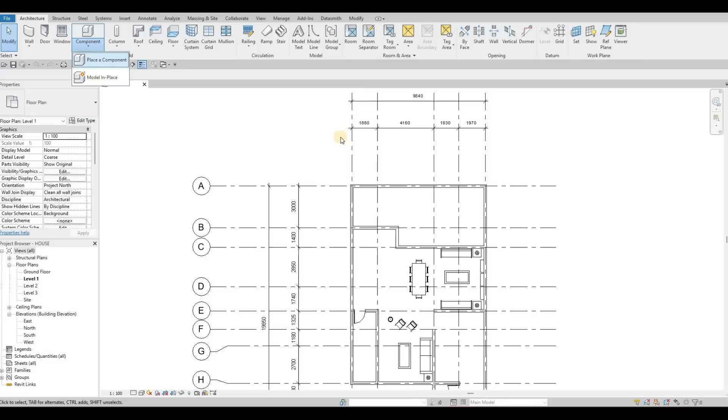So what we're gonna do is click here under Architecture, Component, and then Model In Place. We're going to select Generic Model and then press OK. You can even name this, put it as base cabinet for kitchen or whatever name you want, but I'm just gonna leave it at Generic Model number 1.

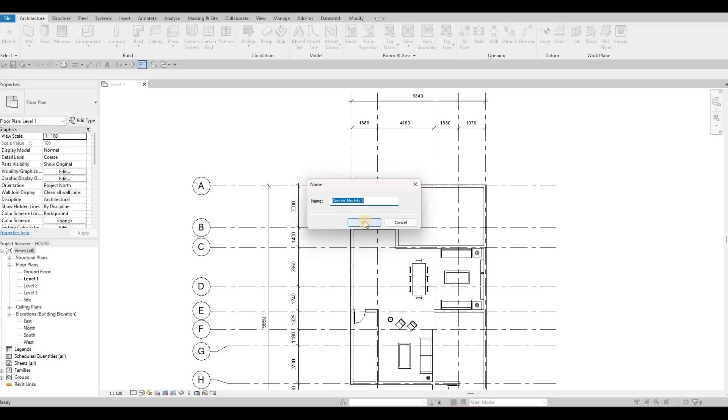And then after that, we're going to create an extrusion, and then we're going to select this rectangle right here. I'm planning on adding the fridge right on this area, so I'm gonna give some space. And the good thing about model in place is that it is easy to manipulate afterwards.

So we're just going to create this for now, and then we could extend it or decrease it depending on how we want it. So here, the depth, I'm gonna set it as 700. You can even put it as 800 because we have enough space, so it's really depending on you. Just to be sure, I'm going to put 750, and then here as well 750.

And then of course you need some space on this side for people to have some room to go in and out from the laundry. So I'm going to extend this one all the way right here, and that's good enough space.

And then here will be the fridge, and then I'm gonna create a casing for the fridge, and then we're gonna add those fridge right there. So TR, trim to extend, and then delete this part right here.

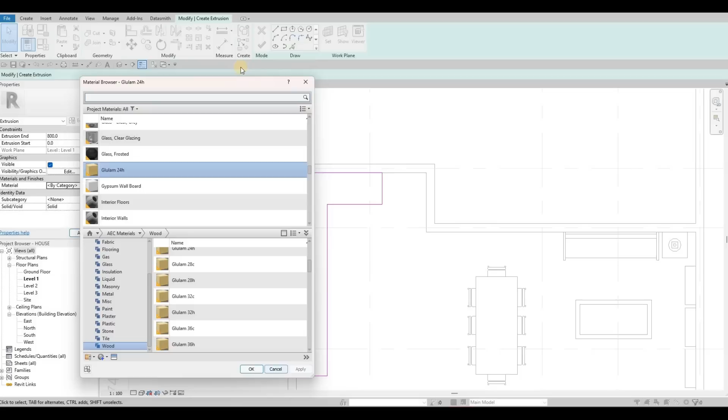I'm going to pull it up, and then Glulam 24h, and then click finish right there.

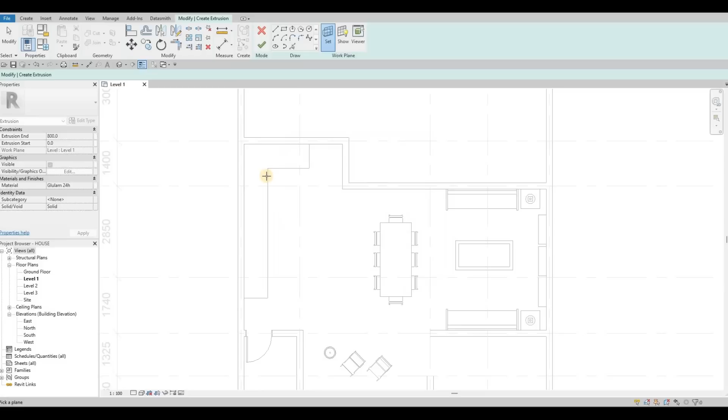So we have that one created, and then we're going to add in our countertop. So we're going to create again extrusion, but we're going to set it at the top of here. So pick a plane, and then we're gonna select the top of this one. So now it will be exactly at the 85 or 800 height, and then we're just gonna extrude it 25, so the thickness for the countertop.

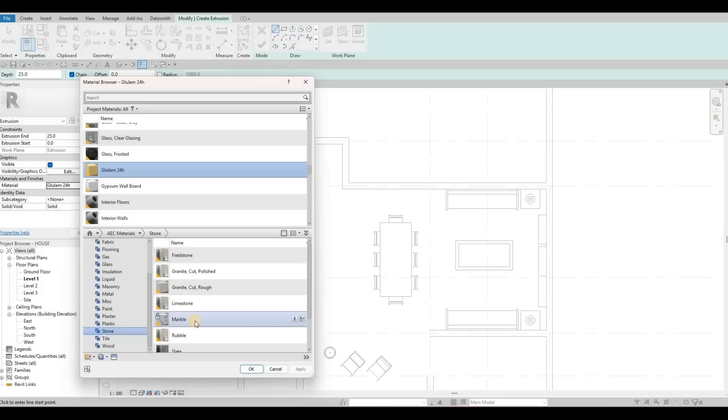And then we're going to put it at a stone material. So Granite, Cut, Polished, we're gonna use that. Apply, and then OK. So now we're gonna do the same thing, but we're just gonna use this so that we don't need to do trim and extend.

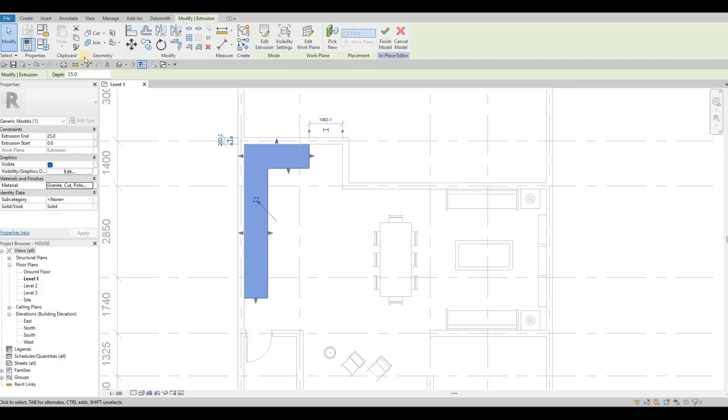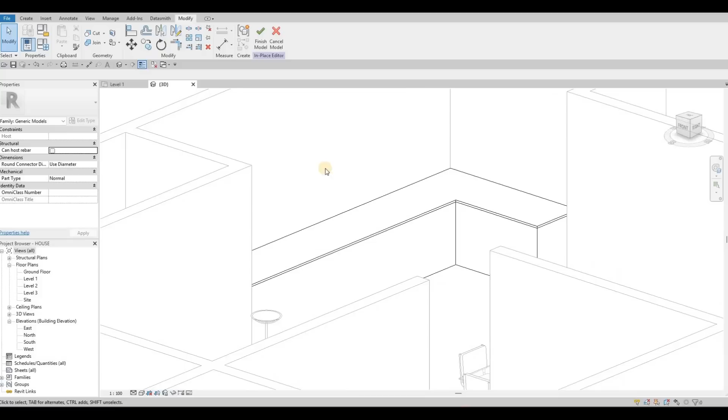And then click finish. So now if we see this one, we could go 3D. As you can see, we have that one all to the proper height, and then this one is 25 millimeters thick for the countertop. And then of course we're gonna create some top cabinets as well.

So now we're going to go at level 1 again. And then here, it's really up to you in terms of how you're gonna add it.

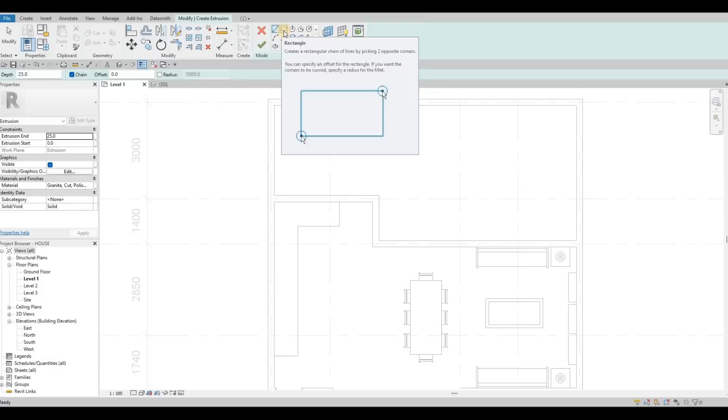I'm going to create another extrusion on top of this, and then I'm gonna use this one again, rectangle, and then I'm going to add around 500, or even 450 if you want. 450.

This will be for the cabinets at the top level of the kitchen. So here I'm going to trim and extend, and then delete those small ones.

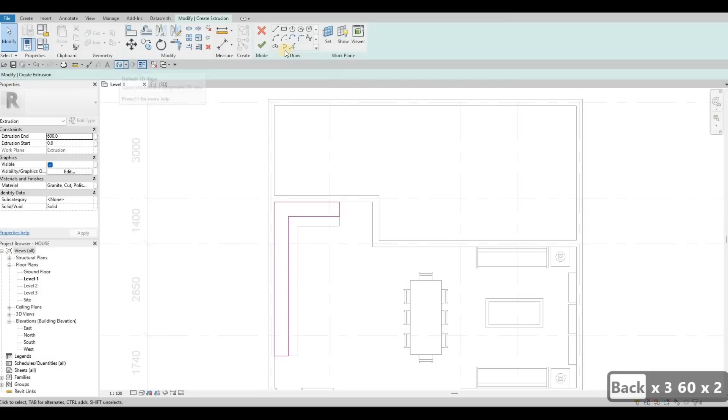Here I'm going to make it a little big, 900, and the good thing about this one is I could estimate it while I'm in 3D. So if I finish this, I can pull it up like that. We're going to have 200 for the flooring, so I'm gonna estimate it like that.

And as you can see, we have our cabinets already there. So we can set it up a little bit higher or a little bit down if you want. I'm just gonna leave it like this. I'm going to have a backsplash as well.

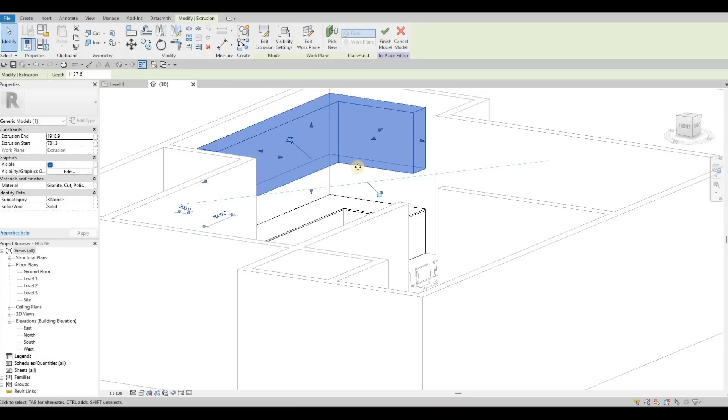We could put in some lights, and then we're gonna put some faces on this kitchen cabinets. But here we need to change it to the same one as the base cabinet, and then there you go. That looks good right there.

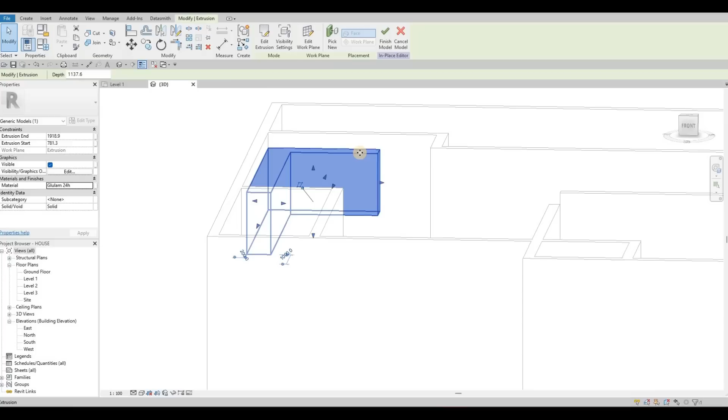200 for the floor, so it will be around here. We're just estimating it now, so maybe we could do it properly here. So we have 3,000.

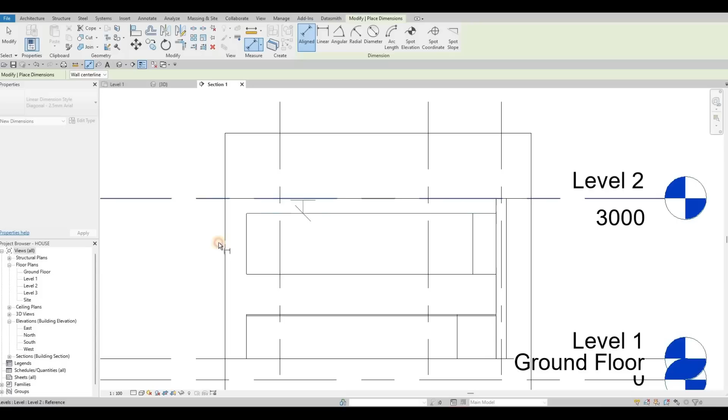What we can do is finish this first, go to level 1, and then create a section. So click here and then section, so that we could see everything. Flip this one, press escape, and then double click this one. Now we can be exactly just 200 of this. If you want to be exact, you can definitely be, so that we don't have any more problems.

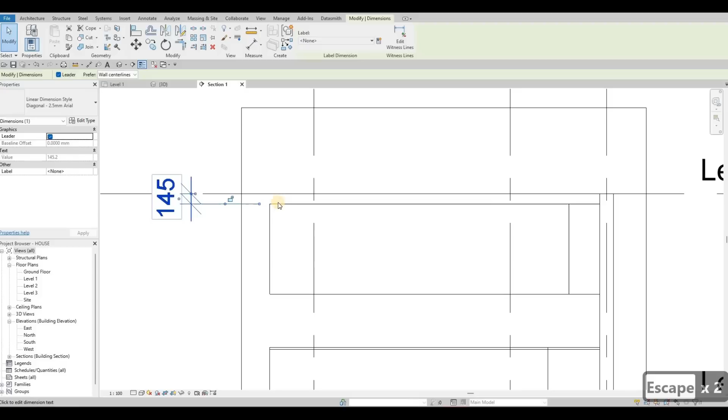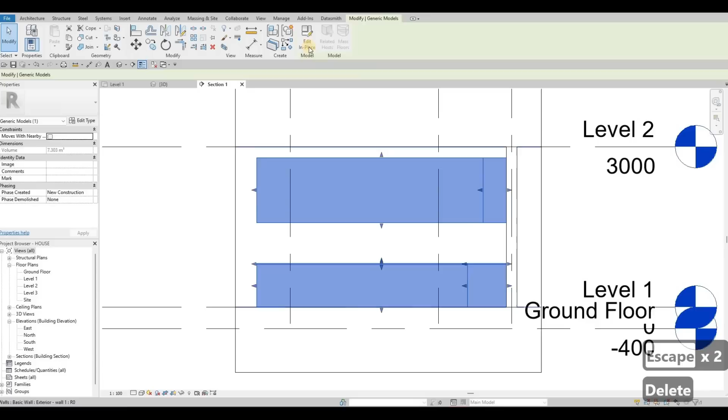For some reason it's not doing it, so I'm just going to manually decrease on that. So there we go, 200. Actually we could even edit in place so that... now I think that's good enough even for the backsplash. So we're good with that.

We have the thickness here. It really depends on you if you want to pull it up or down a little bit more. For me, I'm just estimating it, and I think this is good enough. So we have this one all the way to the top, and then we have backsplash here.

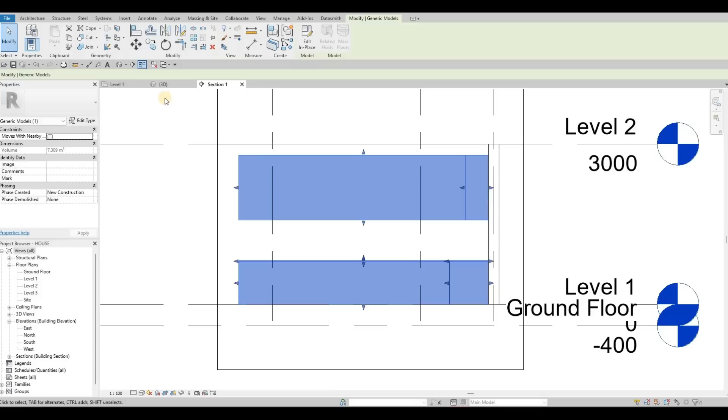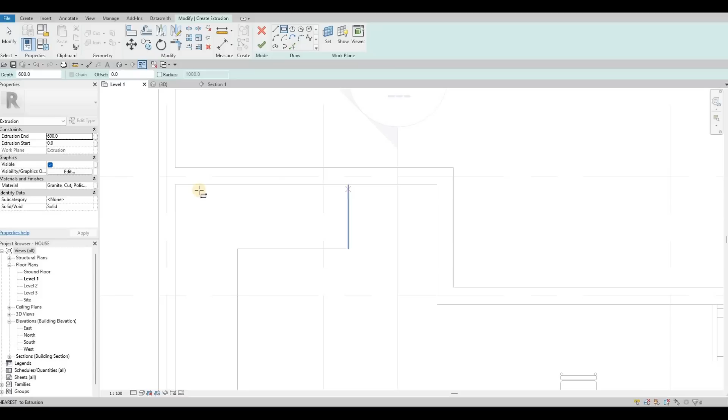So for the backsplash, what I'm going to do as well is add something here. I'm going to edit in place, extrusion, and create an extrusion from here. We're going to make it a little bit bigger for now, because it's giving us some problem.

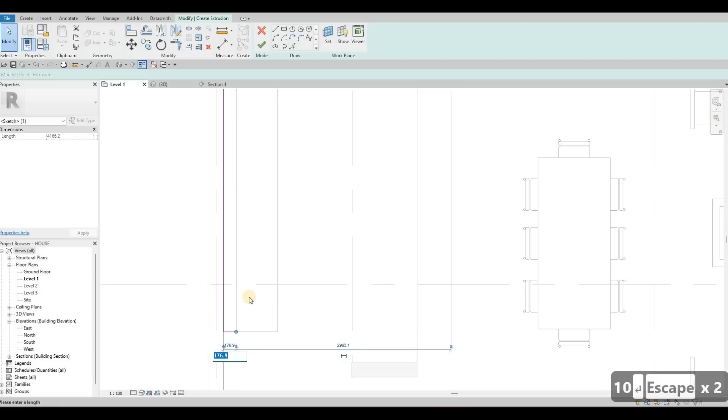We could put in 10, so 5 is too thin, so I'm going to put in 10 for the thickness. There we go. And then we could just trim and extend again, and then delete those small ones.

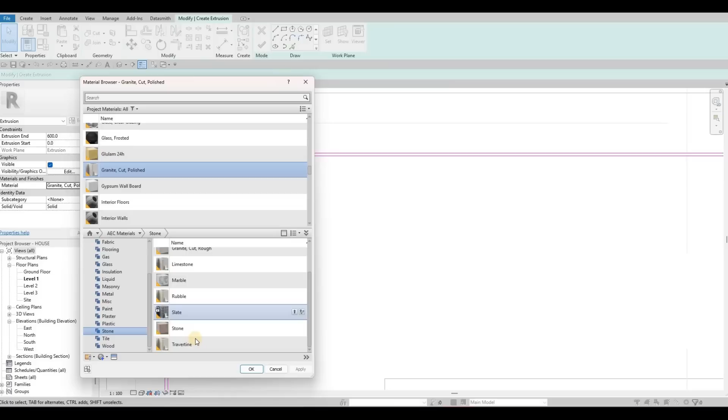And then we should change the material. So let's go to the stone, and we have... let's use this one, cut rough, or we could do maybe mosaic.

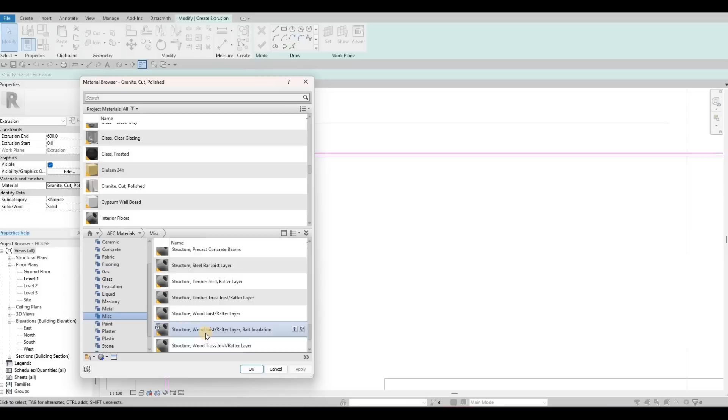Let me look in the materials here, because I know we have... not concrete. Oh, let's put in tile, yes. So ceramic tile, we're going to use ceramic tile.

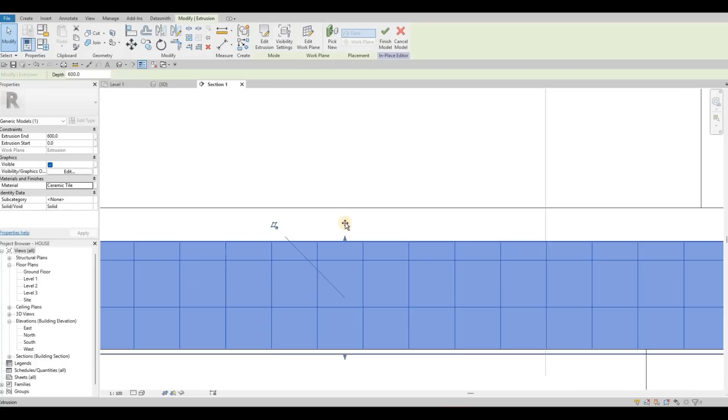So there we go. And we should click finish, and then go to section so that we could manually pull it up and pull it down if it's too much. So there we go. So everything is looking proper. Every distance and everything is good.

So now we could click on finish here, and set everything else. I want now to add the fridge here, and then we could assess and build the casing for that.

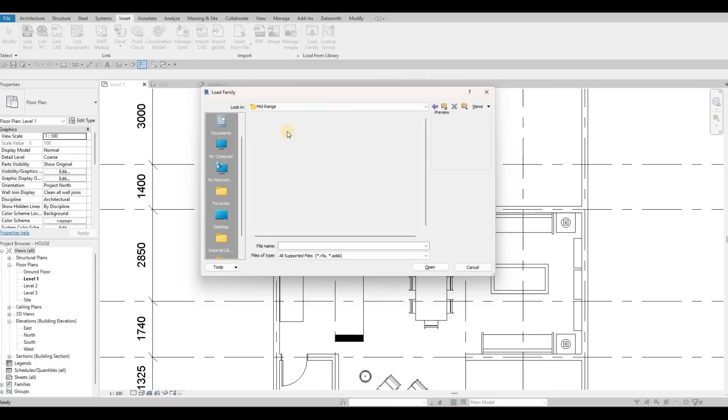So let's go to insert, load family, and we have specialty equipment here, and then we could put in domestic, and then mid-range, and we could select those. So let's toggle to others.

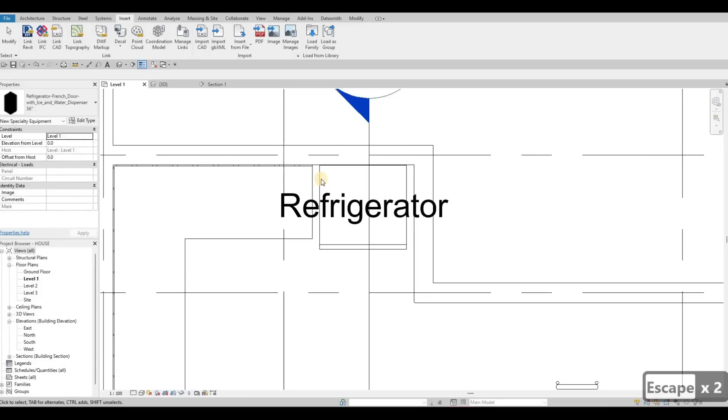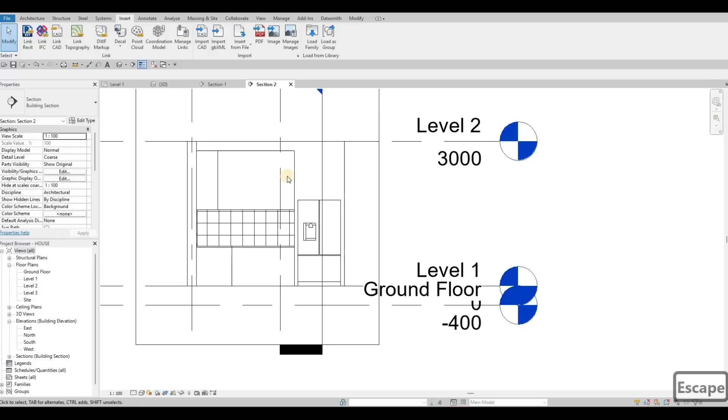So now we could create a section going on this side, and we're going to flip it so that we can see what's going on here, and then we could add in the casework that we want. I think the sizing is perfect, so I'm happy with that.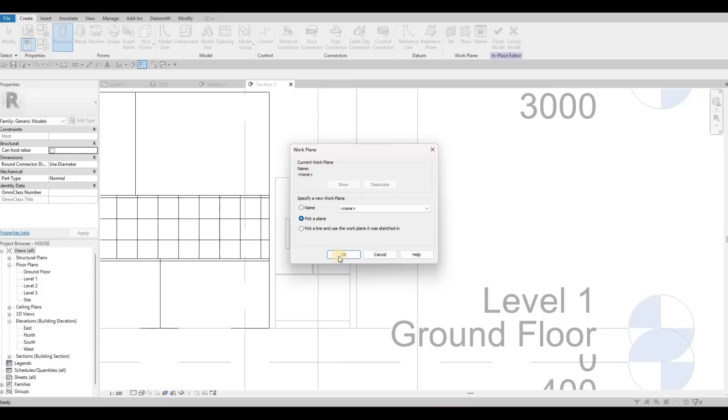So I'm going to edit this, and then edit in place, and put in an extrusion, pick a plane, and select this wall. There we go. And we're going to create a casing for this.

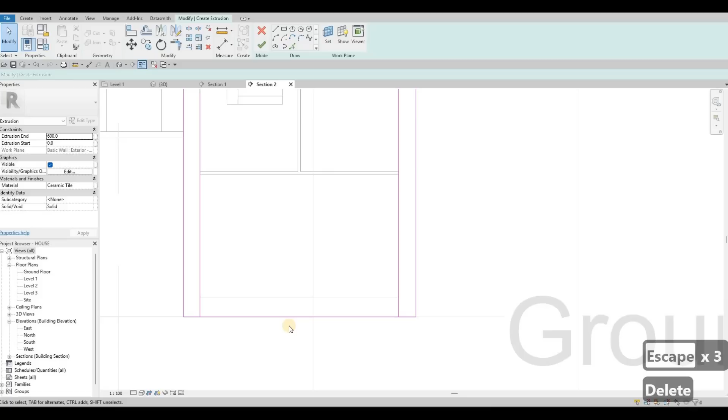And then remove things that are double there. So I'm going to SL, split this one, TR, trim and extend. There we go. And then click on finish.

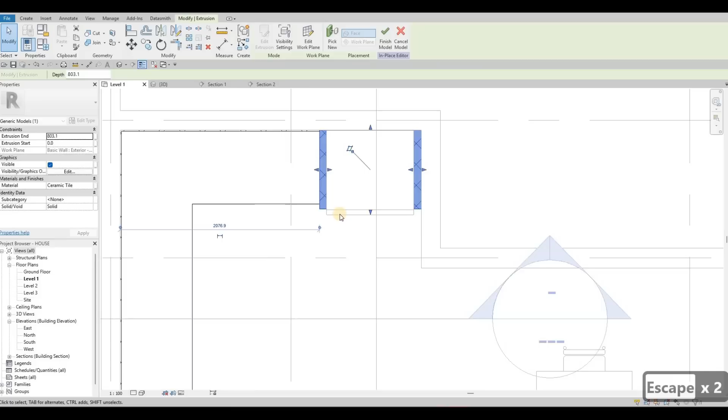And then it's better to look at it on level 1 so that we could extend the casing size. We could just put this one all the way to the fridge door. So AL, it's not actually working, so we could just estimate it. So that's good enough.

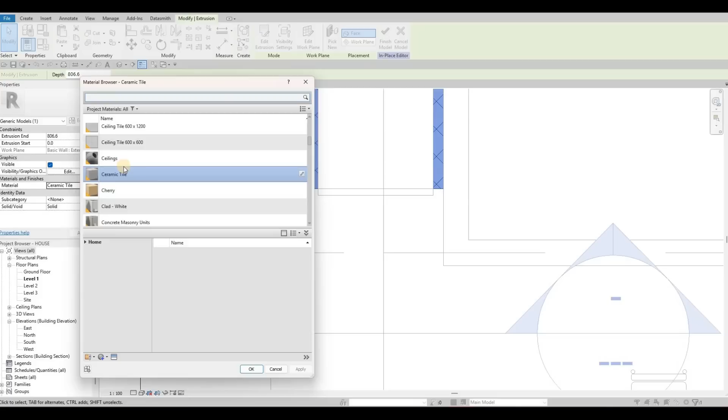Click finish, and then actually we forgot to set the material. I'm going to set the material for this one with the same one, the Ceramic Tile. There we go. So now if we see it in 3D, we can see that everything is with casing.

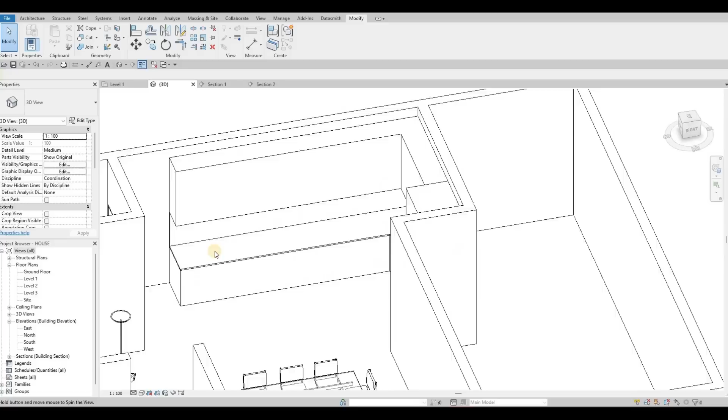And then here I want the same one with the case, but with a different one. So we have those stove, built-in stove and microwave. I want to add that. So here, because we use model in place, you can see that it's so easy for us to move this one like that and give some space for what we're planning to add.

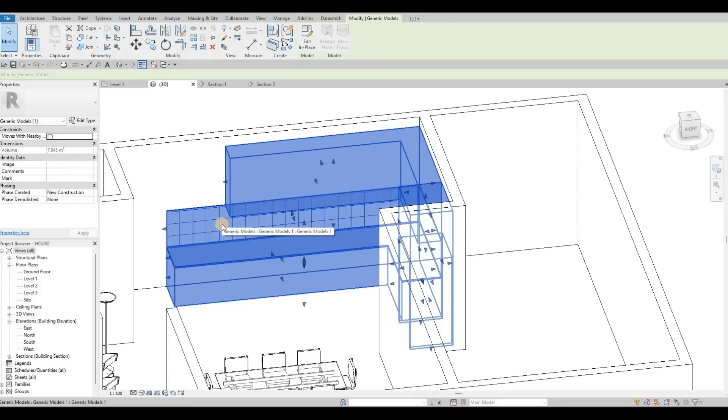So I'm going to go to section 1 to make it easier for me. I'm going to pull it out like this, give it some space. Not a lot, but good enough so that we can see where the door will be. So here is the wall for the door, and then we could estimate. So I'm gonna put it right here so that we have room for people to come in and out.

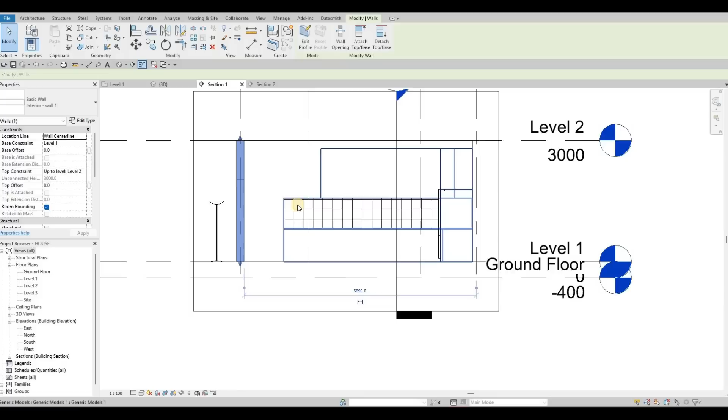So I'm going to pull it like this, align. I'm gonna move everything else. Align from here.

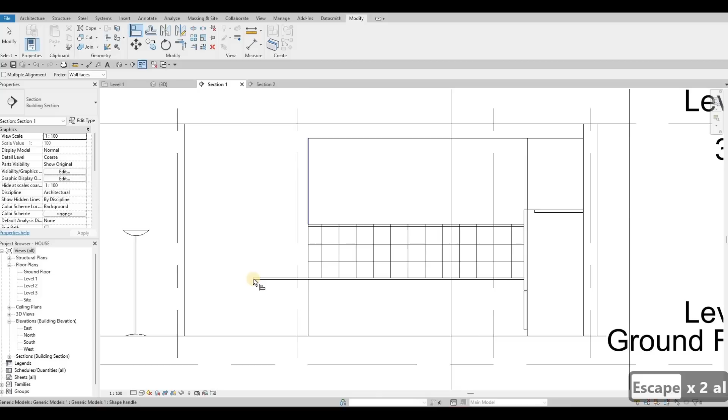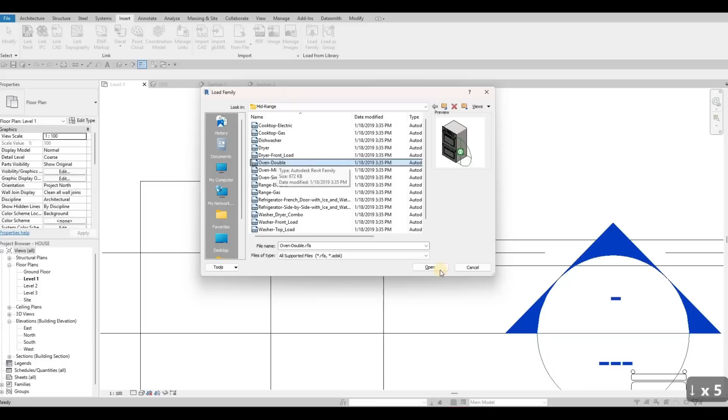There we go. And then let's go to level 1, go to insert, load family, and we have those dual. So this one, oven double. So I'm going to use this one. Click open, and then press escape, CM, and then we have the oven right here.

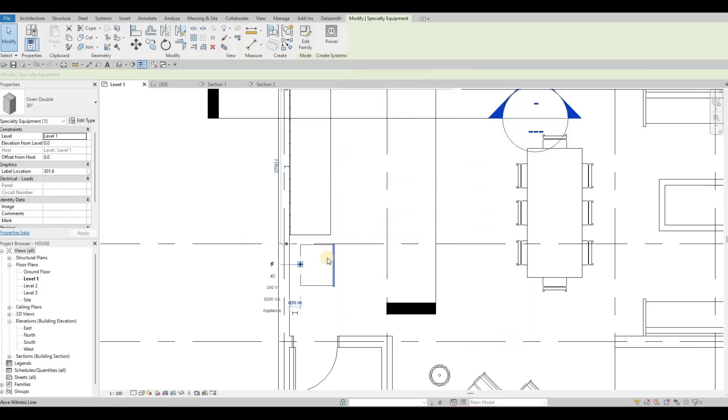I'm going to face it like this, and then remove the label as well so it doesn't bother us, and then align it right here like that. Move it closer, or if we want, we're just going to estimate. I'm going to put the casing here so we have enough space to walk. So I'm just going to leave it like that then.

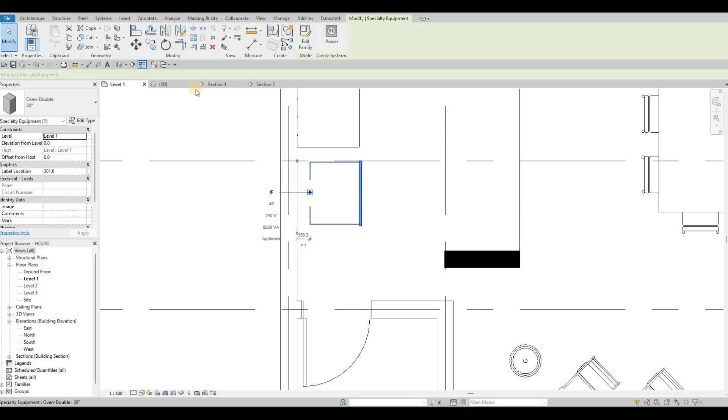Go to section, pull it up so that it's in the right height. I'm going to estimate. We could load here and then load here. That's good enough. So around 800 is perfect height for this one.

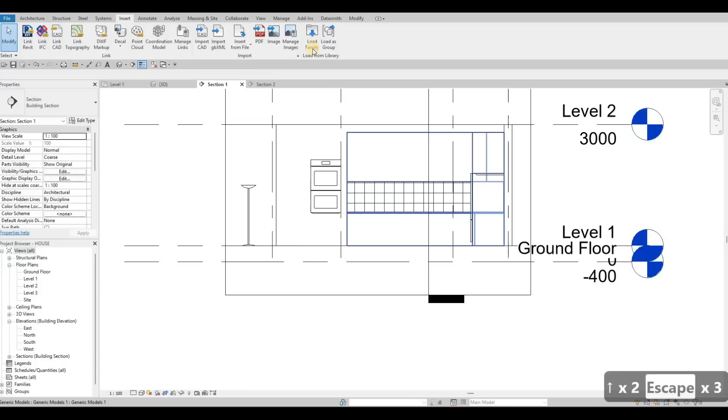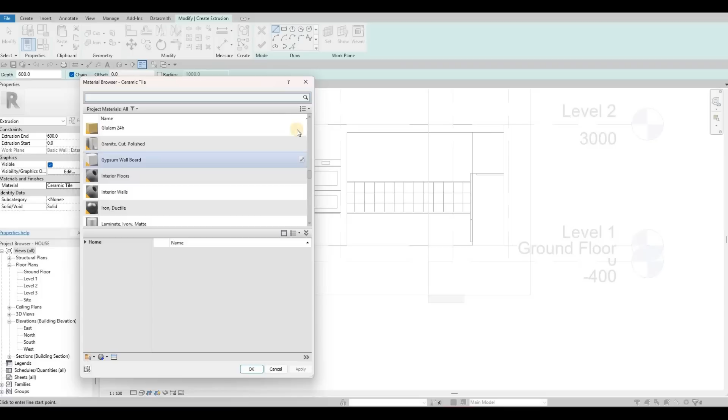And then now we're going to do the casing as well with the same Glulam material. So edit, and then extrusion, pick a plane. We're going to select the wall, and then make sure this one is changed. So Glulam, go down, and then select this one, and then go create the case for this, something like that.

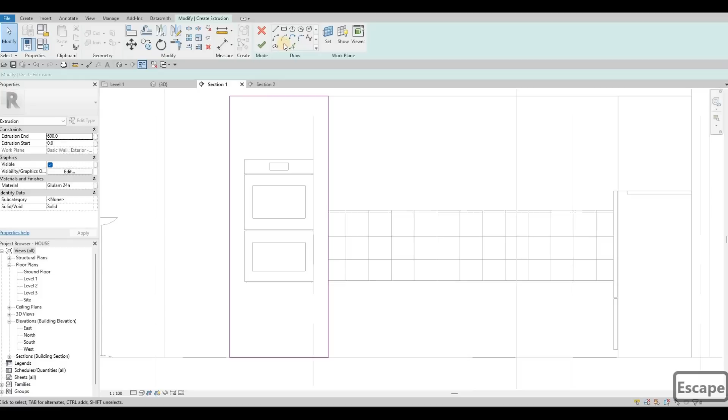Make sure the distance from here is the same one as this, or you can move this one in the middle so that everything looks nice. And then here we could just create this one right here for the case, and then click finish.

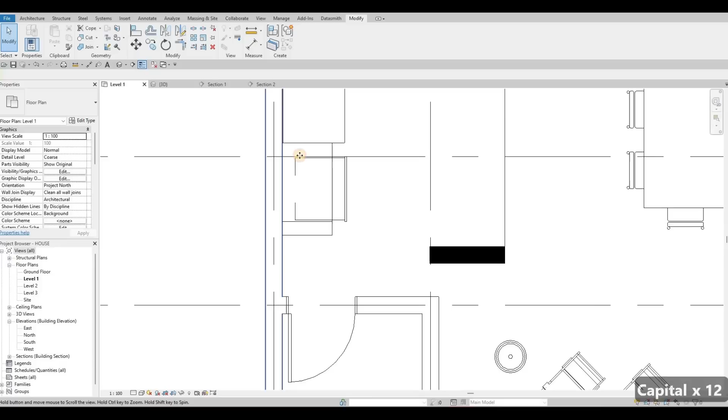And then if we click finish again and go to 3D, as you can see, we have enough. And then you could just move this one again. There we go. And then that looks perfect, as you can see.

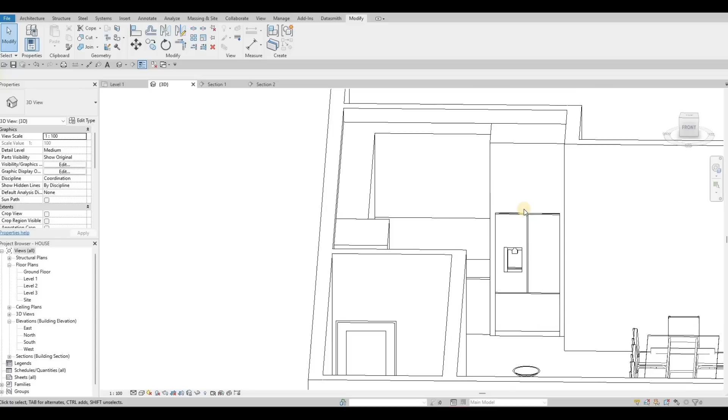And then of course we're going to add the faces for this. So we're going to create those ones. So the plan for the next video is add those faces. We have the handles already as well.

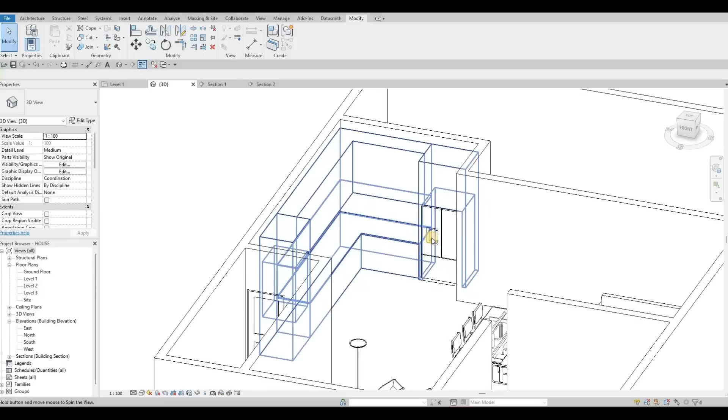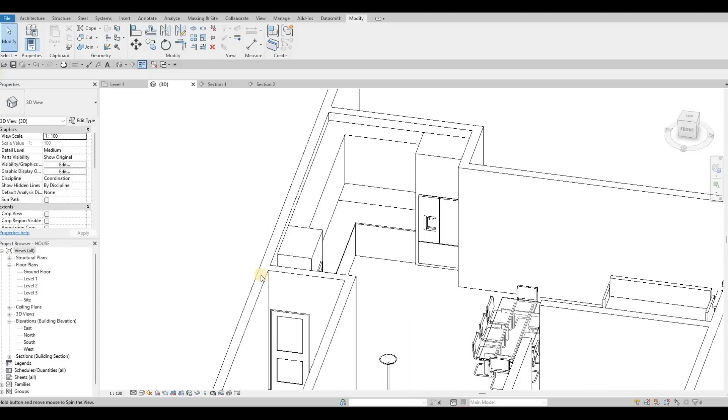So looks like enough space to go to the laundry room, and then we have this one right there, and then the fridge right here. We're gonna put in cabinets at the top as well. We could put a big cabinet here, and then maybe we could make this one as open just to change it. So actually we could do that now, just quickly.

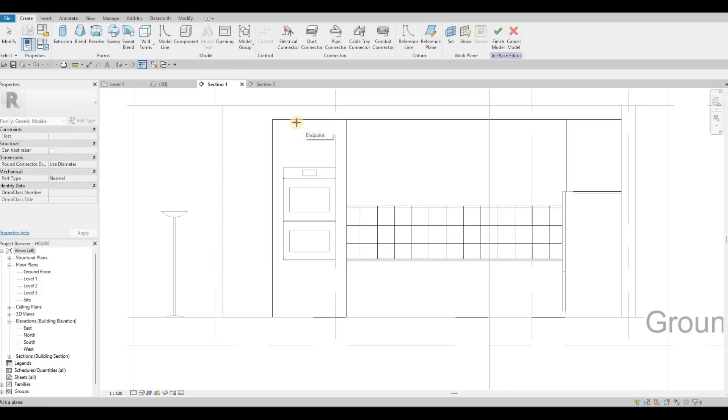So section, select this one, edit in place, and then we could create, and then void extrusion, pick a plane. We're going to select this plane right here. And then we're going to create the rectangle right there.

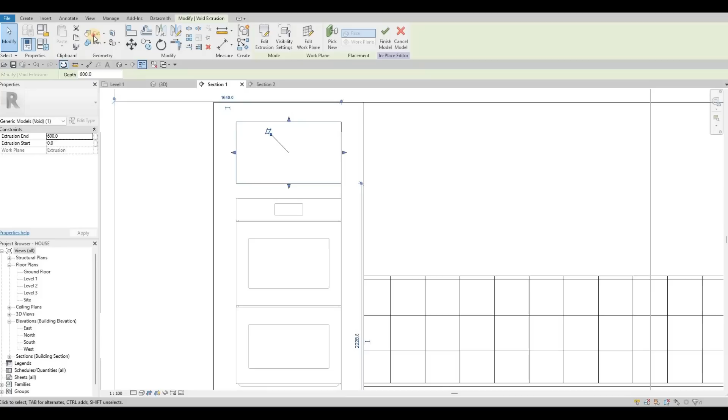Align. And then click on finish. And then let's go and cut geometry, and then let's see how it looks. It's better to see it right here.

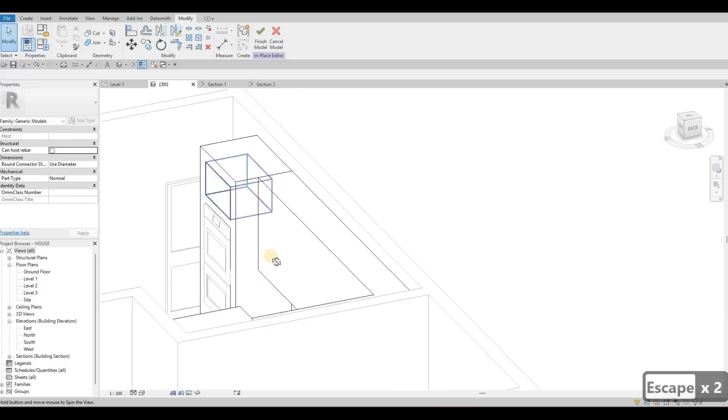And then we can pull it back a little bit so that it's not all the way. So that's looking good right there. I'm happy with the way that looks there. So in the next video, we're going to continue working on this.